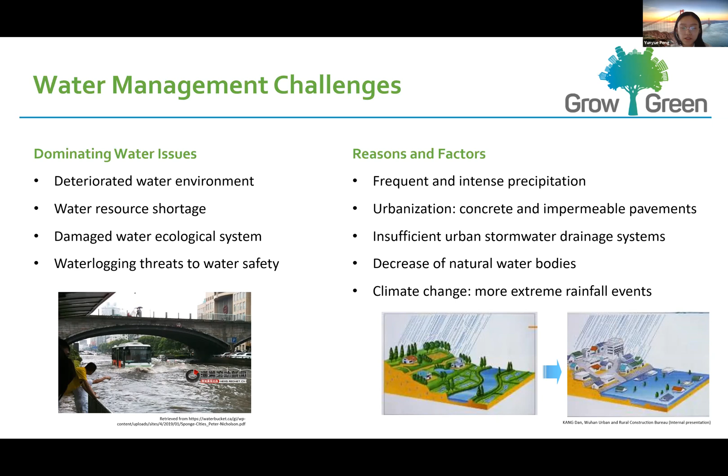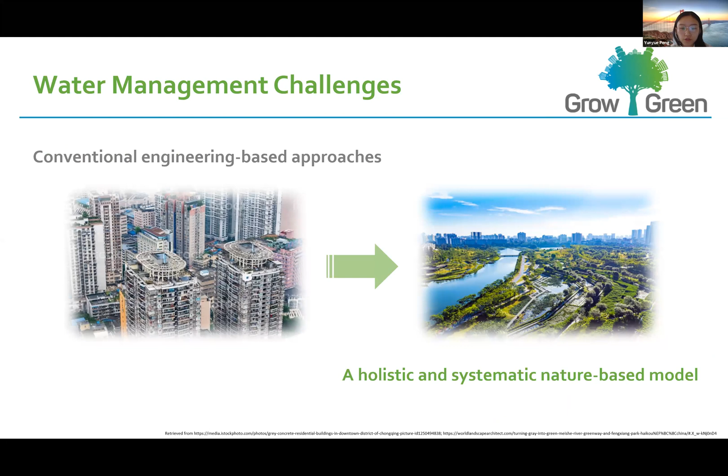In addition to that, the decreased natural water bodies and climate change has also exacerbated the situation. So there's an urgent need to transform from conventional engineering-based approaches to address the new types of water management challenges in urban areas to a holistic and systematic nature-based model.

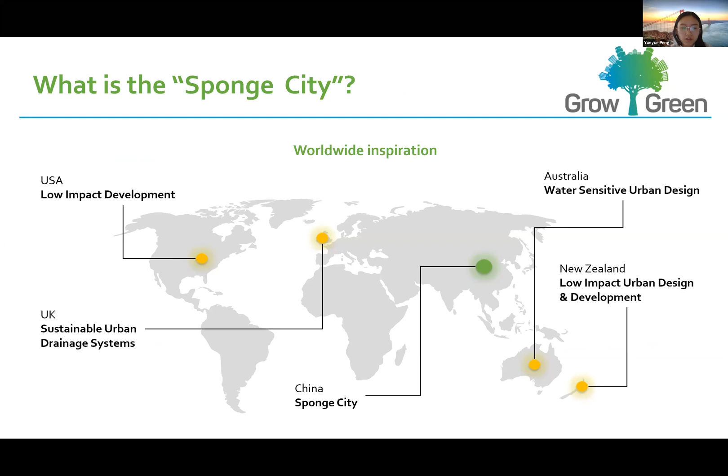So what is the sponge city? The concept was derived worldwide, similar to the concept of low-impact developments from the USA. The sponge city concept refers to a way of urban management that allows cities to use natural forces and

enable urban areas and infrastructure to act like sponges in order to resolve urban waterlogging and flooding, to improve water storage and water quality through a combination of nature-based and grey solutions.

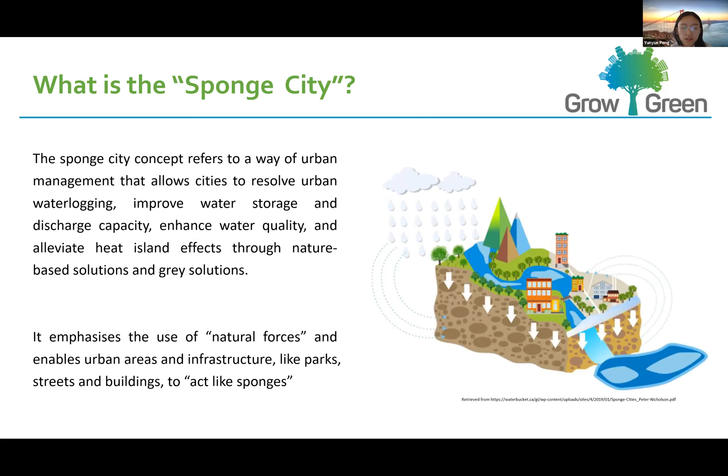The concepts also utilize 6 different technique measures, including infiltration, retention, storage, and purification.

Now let's look at the Sponge City program at the national level. At the national level, it sets the targets to construct 20% of the urban area into sponge standards by 2020 and 80% by 2030. They also published a set of national policies, and in total 30 pilot cities were selected to implement the program.

Then talking about the financial investment of the Sponge City program, different levels of governments work together to provide funds and also promote social investments to engage social private sectors in the Sponge City program through public-private partnerships and franchising.

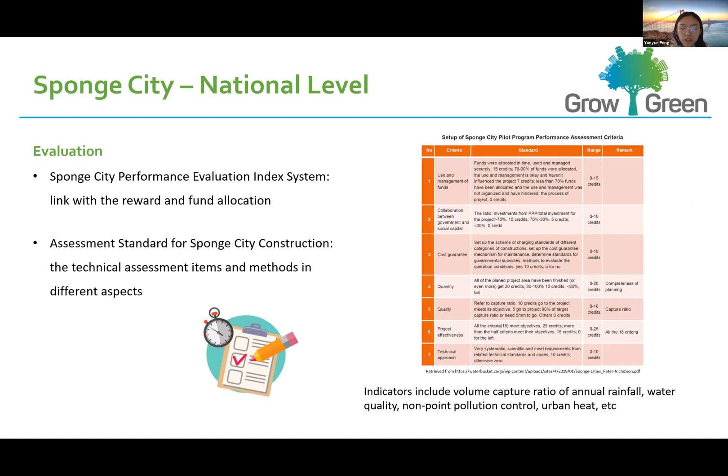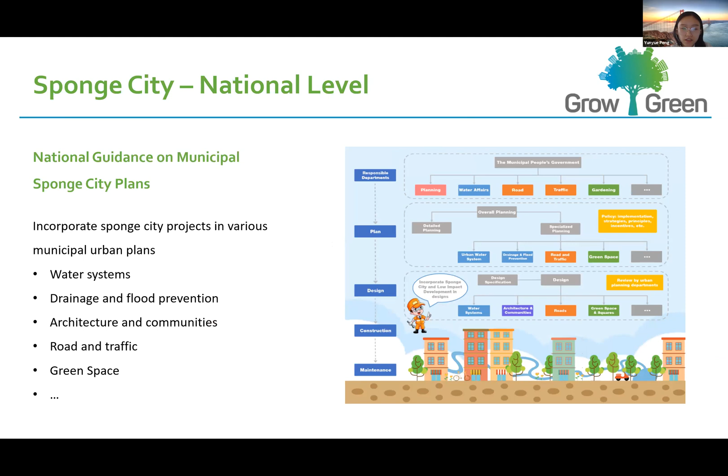The Sponge City program also established a set of indicators and evaluation criteria to evaluate the performance of different cities. And they also provided guidance to incorporate sponge projects in various municipal sectors and municipal infrastructure.

So let's move on to Wuhan. Wuhan is well known as the city of 100 lakes, and around a quarter of the municipal area is occupied by water. The principal challenges that Wuhan is facing include waterlogging and water pollution, primarily due to the low elevation of the built-up area, intense precipitation, urbanization, and decreased natural lakes.

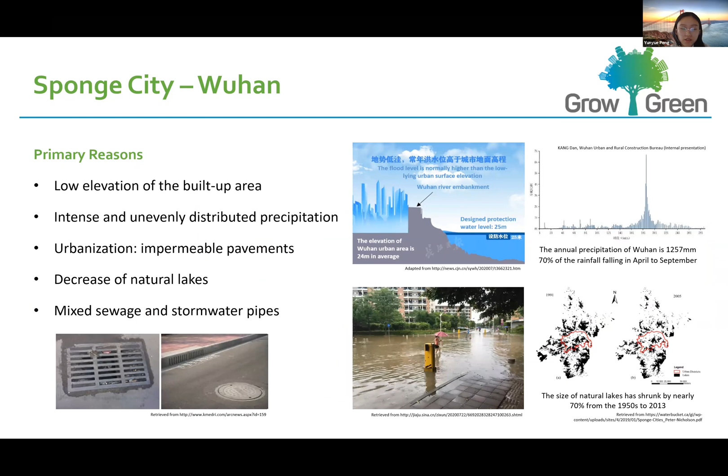And also the mixed sewage and stormwater pipes make the water pollution situation even worse.

Following the national guidance, they also set the targets as to construct 20% of the urban area into sponge standards by 2020, which has already been achieved, and 80% by 2030.

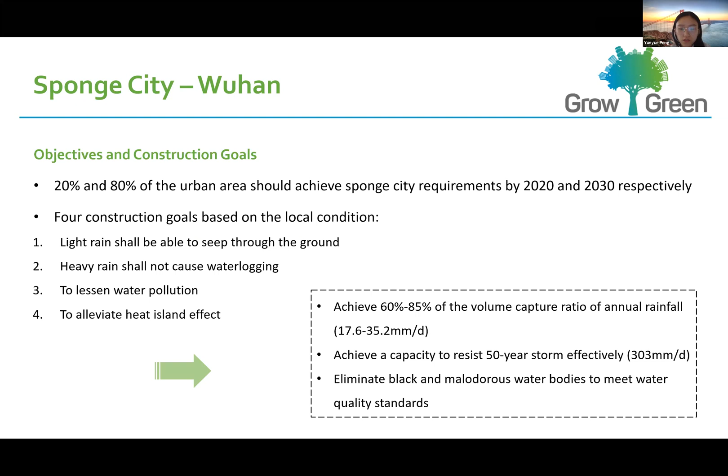To adopt the concepts according to local conditions, they also established different technique targets, such as the volume capture ratio of annual rainfall, the capacity to resist a 50-year storm, and to eliminate water pollution and improve water quality.

Wuhan has also addressed systematic and whole-process management using a combination of green, blue, and gray infrastructure. They applied both engineering and non-engineering measures. The non-engineering measures refer to daily operation, maintenance, and emergency response.

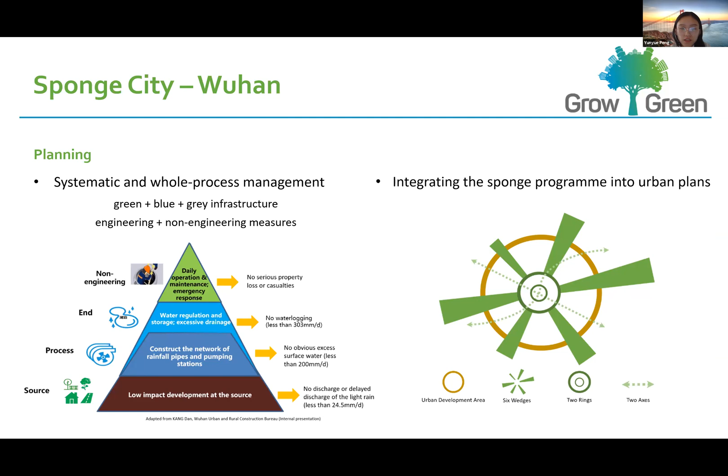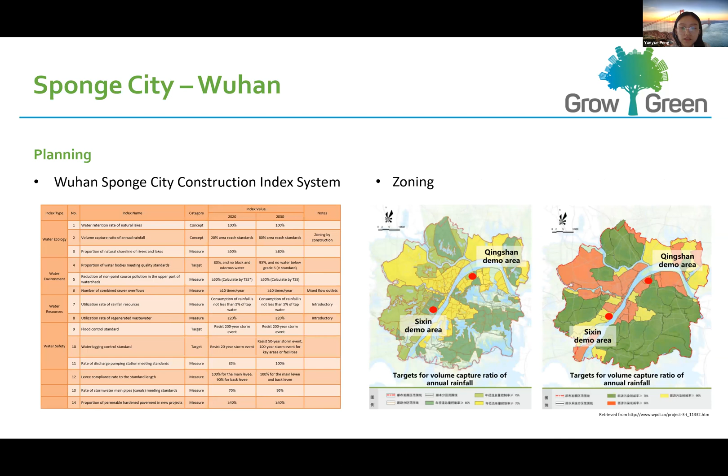They also proposed the plan to integrate sponge projects in urban comprehensive plans. The Wuhan Sponge City program also established an index system and allocated different indicators in different zones.

Specifically speaking about the sponge infrastructures, they have applied both nature-based solutions and green solutions, such as rain gardens, green roofs, grass swales, and also solutions including permeable pavements and rainwater storage modules.

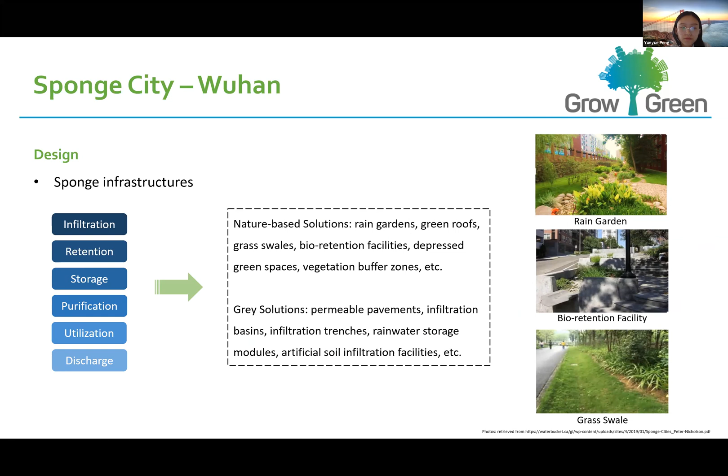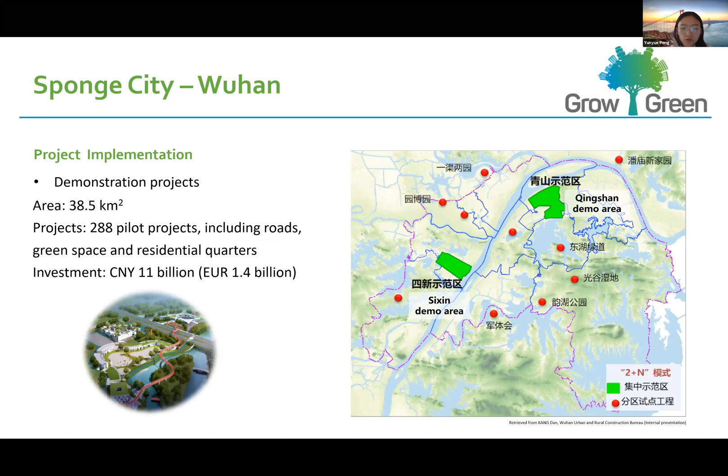Regarding the project's implementation, Wuhan has designated 2 demonstration areas, hosting nearly 300 pilot projects and attracting an investment of around 11 billion yuan. The 2 demonstration areas: one is located in an old residential quarter and another is located in the new development area, showcasing the different types of sponge technologies and facilities that can be used in different types of urban areas.

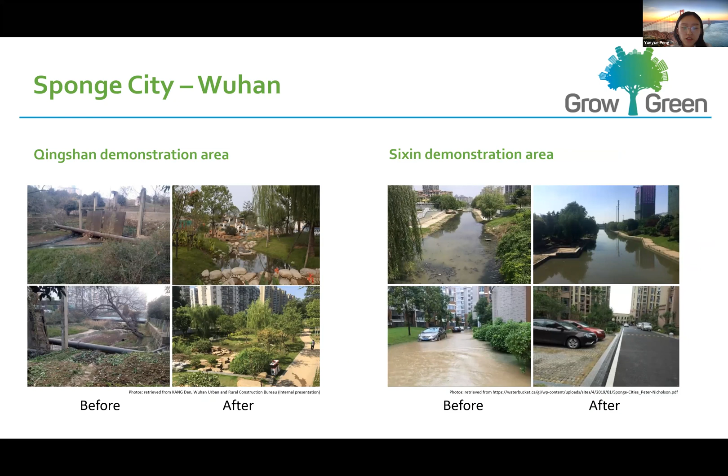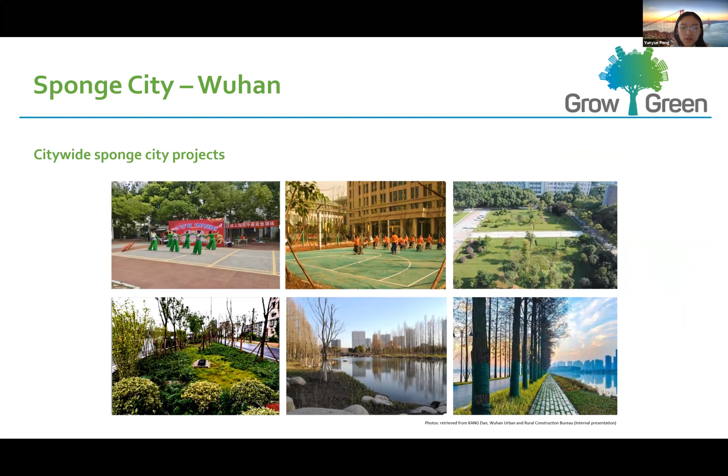At the same time, Wuhan has promoted sponge city projects across the city. Regarding the project's progress, they have already achieved the first goal of completing the construction of 20% of the urban area into sponge standards by the end of last year.

So far, they have achieved quite a few achievements, such as localized governmental management standards, a set of technical standards established by private enterprises, and Wuhan also built up a sponge science exhibition hall for citizen education.

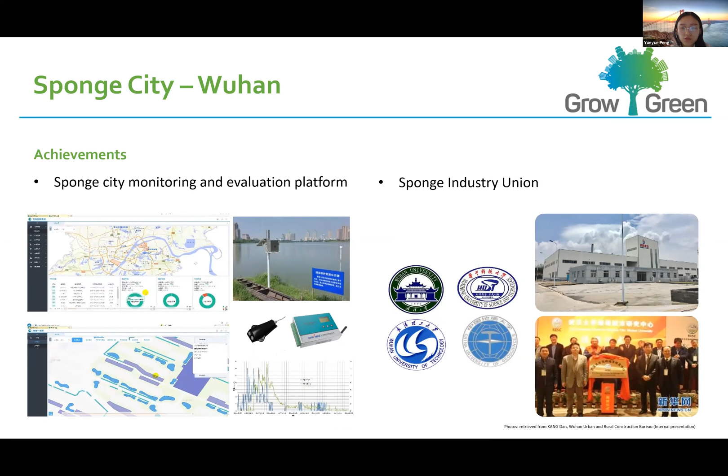Combining this with smart city technologies, they established the sponge city monitoring and evaluation platform to track real-time data and monitor sponge facilities effectively. Wuhan also formed a sponge industry union to promote research and industrial development of sponge technologies.

Talking about the performance of last year, which was another record-breaking rainy season when Wuhan suffered from multiple rounds of intense precipitation, the daily precipitation even reached 472 millimeters. Compared to the storm event in 2016, the number of waterlogging points, the maximum duration, and size area of waterlogging points was significantly reduced.

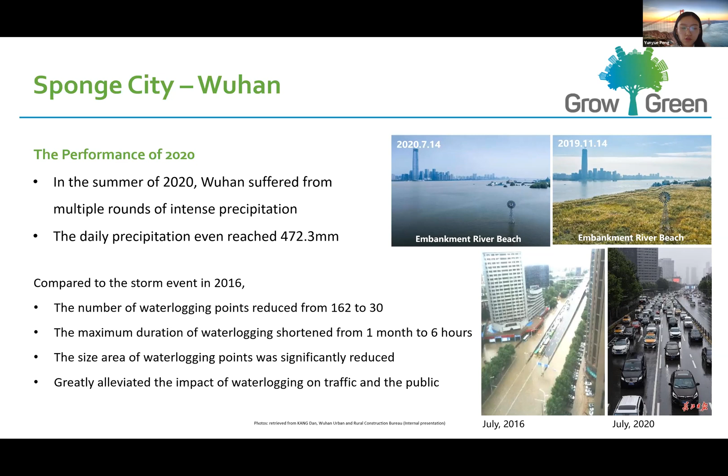If we take a look at the photos here, we can see the impact of waterlogging on traffic was greatly alleviated due to the construction of sponge city projects, showcasing the capacity and potential of nature-based solutions and sponge projects. Lastly, I will give a brief intro to one case study, the Qingshangang Wetlands Sponge Project.

This project is one of the pilot projects located in the old residential quarter, and there were many problems in the area. The river channel was congested with waste, so the drainage capacity was largely reduced, and also because the sewage pipes were discharged into the river channel directly, leading to heavy pollution and eutrophication in the ecosystems.

Also, the open space around the area was constructed into shanties and farmlands, so the entire landscape was quite poor before the construction of sponge projects.

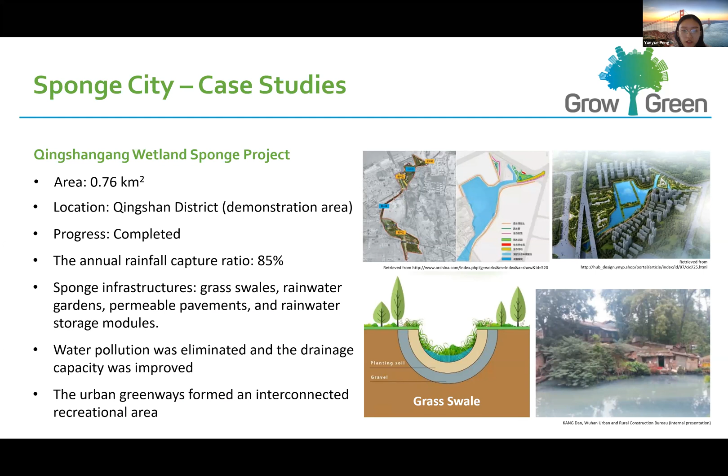These sponge projects aim to enhance the drainage capacity, improve the ecological environments, reduce water pollution, and capture 85% of annual rainfall. They also applied different types of spongy infrastructure, such as rain gardens and source control facilities to absorb rainfall at source, constructed artificial wetlands, and other types of spongy facilities.

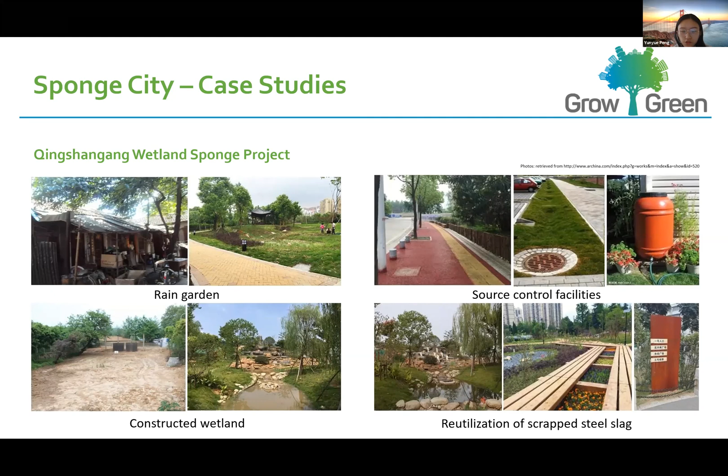In the end, the entire landscape quality has enhanced a lot, forming a recreational area, and the drainage capacity has also improved a lot, which has solved waterlogging and water pollution at the same time. So that's all, thank you.

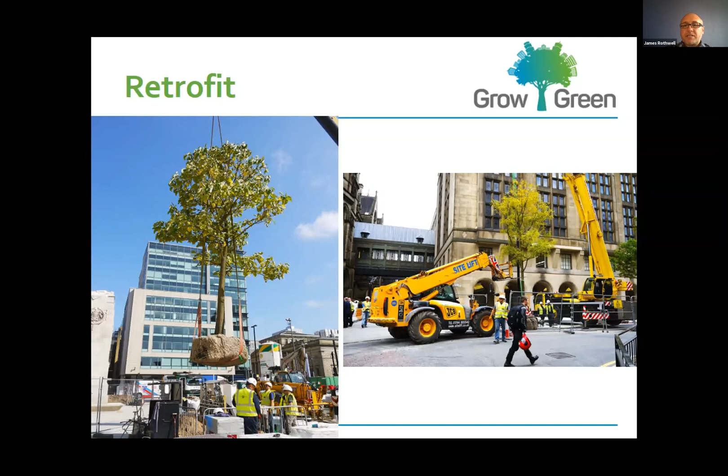Also innovation — Manchester has a tram-based transport network running through the city centre, and here we see sedum mosses planted along the tram tracks, a really nice feature helping with a range of benefits. Central to the Manchester green and blue infrastructure strategy is education and improving awareness, working at ground level with primary school children, who can then go home to their parents and talk about what they've learnt about green and blue infrastructure, the importance of nature, urban challenges in Manchester such as flooding and heatwave potential, and how nature-based solutions and green infrastructure can benefit that.

Starting at a young age and right through, there are important engagement actors within the Manchester area, such as Groundwork, which works closely with local communities, and also ambition as part of the Manchester strategy. This is from the City of Trees, a charity within Manchester, whose aim is to plant 3 million trees across the wider metropolitan region. So there's real ambition, real engagement, and real progress being made on the ground.

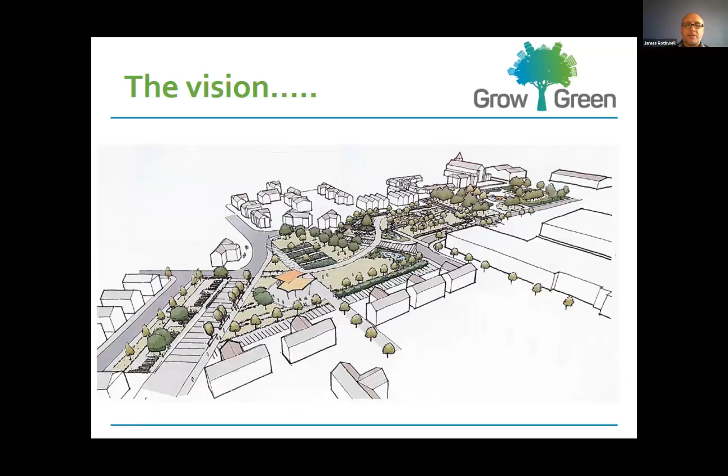The vision was to create a wonderful park that linked the local neighbourhood together, with great access and lots of play space for children, while also embedding nature-based solutions, green infrastructure, and sponge city principles into that design. First and foremost, it looks absolutely fantastic — I hope you all agree.

There's lots of high quality play space for local children to play, engage, and see the benefit of being outdoors. Woven into this play space is a number of sponge city principles: taking water that would ordinarily have gone into an overloaded sewer system with capacity issues that can lead to downstream flooding, and instead redirecting that rainwater, which would normally go down the drains, to be used within this green space.

So here we have one of a number of features which I'll take you through now — in our West Gorton Park, the park that drinks water.

This might look like a traditional basketball court, but it actually has a slight gradient, and the water is taken from the basketball court and used to irrigate the green space. It's taken into bioretention tree pits, watering those trees, with any excess taken off back to the sewer system. So it's reusing the water — ordinarily you'd have connected that water falling on the basketball court straight into a local drain and off into the sewer system, but instead it's disconnected and rerouted through the green space.

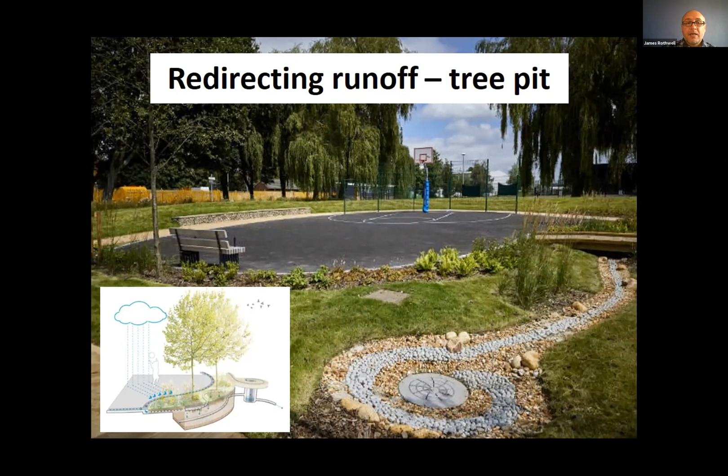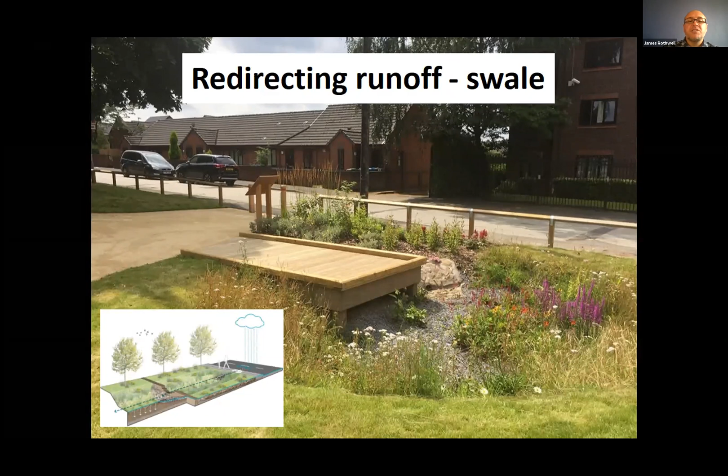Here we have, again taking inspiration from Wuhan, planted swales. Road runoff is redirected from this adjacent road, under the pavement, through that stone head wall, and into this planted swale — a really beautiful feature, with a little jetty area so residents and visitors can see and feel part of that feature.

It's not a feature that's tucked away in one part of the park. It's something that people can see the functionality, engage with and interact with.

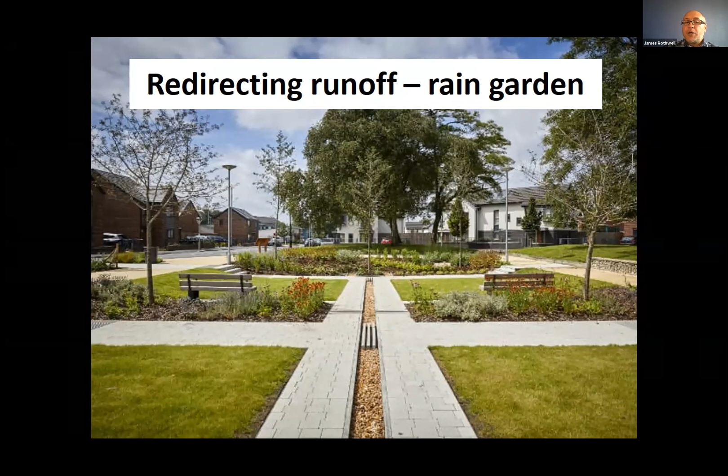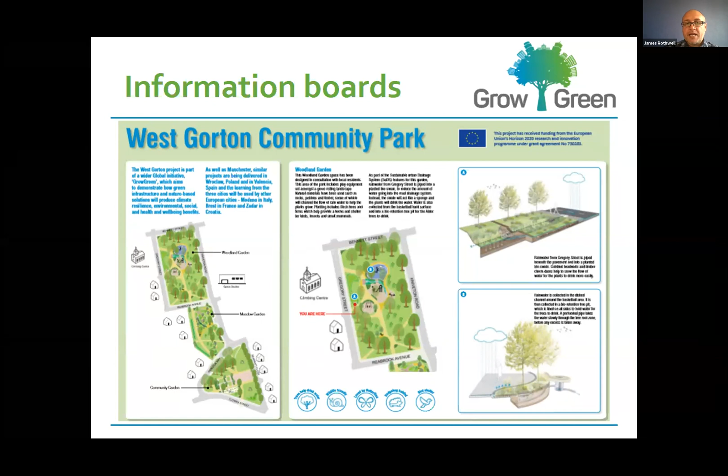Redirecting that runoff that would ordinarily have gone straight to the sewer system. Again, taking inspiration from Wuhan, and also what local residents wanted to see was, what are all these features? What are they doing? So we've got a number of information boards around the park that situate the visitors, the residents, where they are located, but also giving them some information about the benefits of what those features are doing. What are those check dams doing? Where is the water moving? What's it doing? What are the benefits? So really nice information boards for people to look at.

I just wanted to end now with some photos and a little bit of teaser data on the performance of these features in terms of runoff reduction. We're seeing really fantastic results. The water is being taken from the highway, infiltrated into the ground. The green space is using it, and very little, if any, is being returned to the sewer system.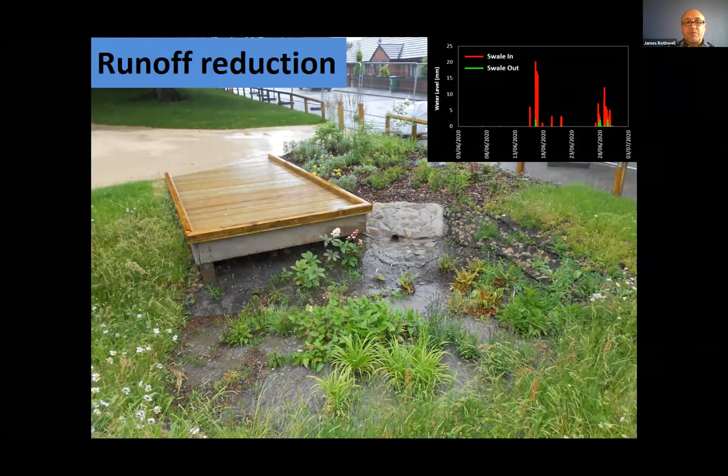So here we have just an action shot. In Manchester, as you may well know, we get lots of rain, and in particular sometimes very stormy weather. Back in early 2021 we had Storm Christoph, which brought huge amounts of rainfall, unprecedented levels of rainfall. So me being a geographer, I wanted to get out and see how the GrowGreen West Gorton Park was functioning. I ran out, got my camera and managed to get some action shots in the height of the storm, then revisited a few days later just to see how that water was being infiltrated.

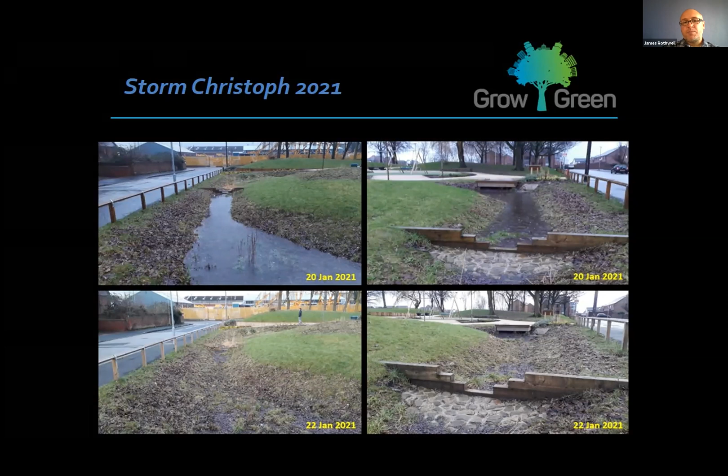As you can see, water in the height of the storm being held in this planted swale, held back by the check dam, encouraging infiltration. Then a few days later I returned, and look, it's all gone. All that water would have gone straight to the sewer system. So we've taken it out of that network and reused it in the green space for the benefits of the park. So I'd like to end there and thank you for your attention.

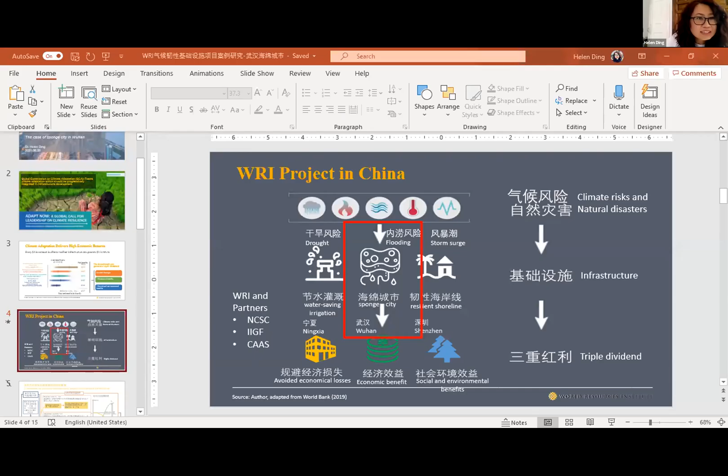So should I load my presentation? Yes, you can share your screen if that's possible. Just give me a second. It doesn't show up actually on my screen. If not, we can also show the slides and you can tell us when to move to the next one. Oh, maybe I didn't see all the windows, I have too many windows open probably. Sorry, oh yeah, I found it. Can you see the slide? Yes, we can see it. Okay, perfect, sorry about that. So you may want to show it in slideshow mode. Yeah, perfect, thanks.

Thank you for inviting me to present our recent project. Unfortunately, my colleague who is actually leading the Sponge City case in Wuhan couldn't join, but I'm happy to share some of our earlier experience there. So before I jump into it, I just wanted to give a very brief background on this project.

I want to shift a little bit the attention now to climate change. I think everyone here has probably been really involved in the current momentum around climate adaptation and climate resilience, especially for urban areas. And last year, in the Netherlands, we actually had the government lead a Global Commission for Climate Adaptation campaign, which set up several important discussions around building climate resilience in urban areas and also in other sectors.

And WRI, as the secretariat of the Global Commission for Climate Adaptation, up until early this year, developed a global study back in 2019 looking at global climate adaptation actions around the world. One of the components was looking into the economic benefits, and what we tried to do is really understand whether investing in climate adaptation early on could generate economic benefits. So in the study, we developed a triple dividend methodology looking at different benefits for investing in climate adaptation actions.

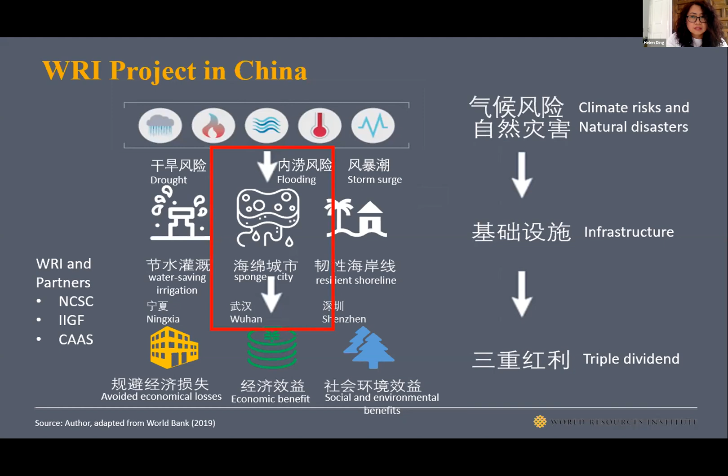I wanted to give a brief intro to the Wuhan case now, but please note that I won't be able to disclose too much detailed calculation at the moment, because the report is still under review currently, and the intended launch date is around September 2021. So I just wanted to use this opportunity to inform everyone to look out for a new study coming from WRI in the next couple of months, where we hope to share more detailed calculation around the benefits we have calculated for Wuhan.

As I mentioned before, what we did is try to look at climate risks projected for 2050 for Wuhan under the IPCC RCP scenarios. What we found is that if you compare different emission scenarios, in the future we can anticipate much higher temperatures in urban areas and also higher, more frequent rainstorm and flooding. That shows a clear trend of climate risk in the future for a city like Wuhan.

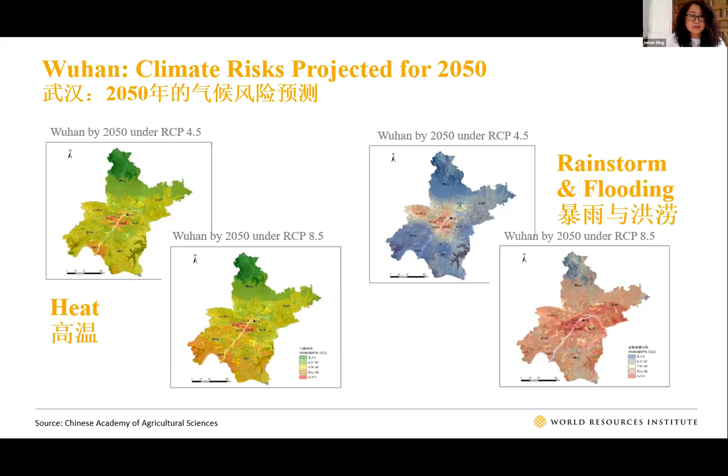Thanks, Yunyue has made an excellent presentation earlier, which laid the foundation for the sponge city concept, so I'm not going to dive into the detail about this anymore. But what I wanted to say is that by 2020, Wuhan wanted to increase sponge city coverage by 20%, and by 2030, the total urban built area that will meet the requirement for sponge city construction standards will increase by 80%. So there is a clear policy insight on building and expanding sponge city in Wuhan.

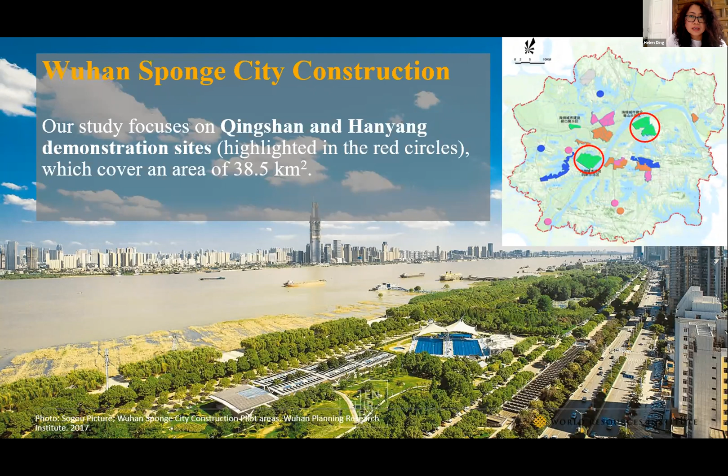In this study, we didn't look at the entire Wuhan urban area. What we did is look at 2 case study areas and try to get as much detailed information as possible to come up with the most robust economic analysis possible. So we look at Qingshan district as well, which was already presented in the earlier presentation by Yunyue.

What we did is look at the sponge city as a supplementary kind of infrastructure to the traditional drainage system, which you're familiar with as pump stations and pipelines. In the new sponge city construction, they actually introduced green infrastructure concepts and nature-based solutions to support the existing infrastructure. This is an important point to make, because when you look at climate resilience benefits, it's very important to understand what are the additionalities. If the city has already started to plan increasing pump stations and improving the current grey infrastructure, that doesn't really give you an understanding of what additional benefits can be brought by the sponge city construction.

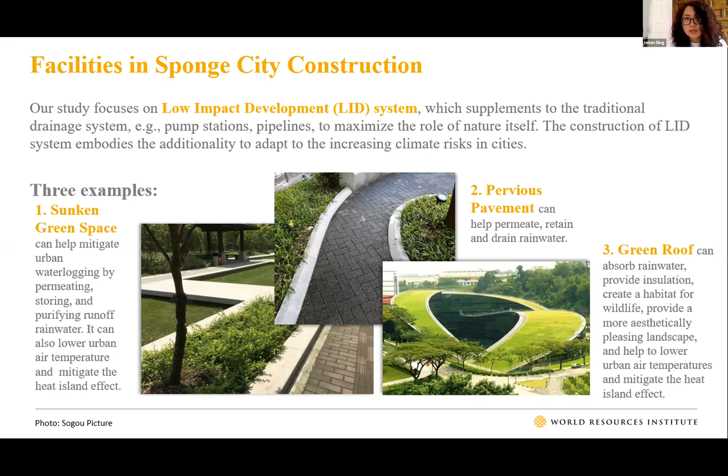So here we just focus on LID, in order to understand how much benefit can be attributed to sponge city infrastructure. In the study, we look at the avoided damage, which consists of 3 components. First is about avoided direct asset damage, coming from historical data to look at how much actual damage is caused by flooding, especially the historical flooding events in 2016, which was one of the major ones, and then the recent 2020 flooding events.

In terms of other avoided damages, green infrastructure can greatly help reduce the runoff, which helps reduce pressure on the existing pipeline network, and also reduces water pollution flowing into the river. All of this can contribute to avoiding costs associated with operation of the urban pipeline network, and also avoid the cost of water pollution control.

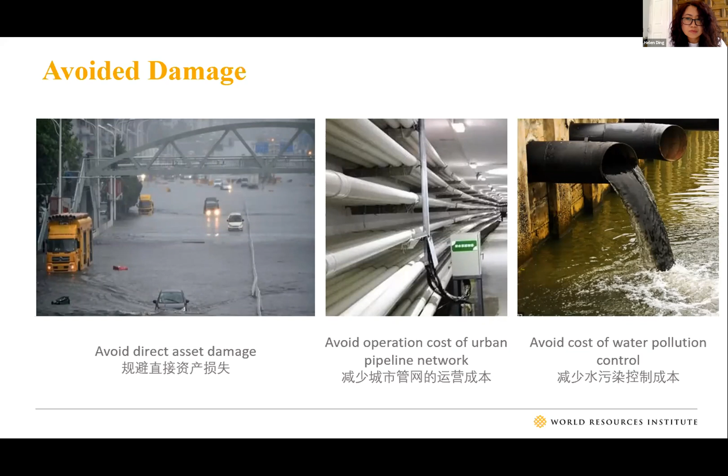In terms of economic benefits, we look at stormwater recycling benefits, where a lot of water can be recycled and support other activities in the city. Additionally, we also look at real estate value increase. I think James also mentioned that this is the case in Manchester as well—you see increasing value of real estate for housing in areas where there are larger green parks and other green infrastructure facilities.

Then the last component is about environmental and social benefits, where we look at how green infrastructure could help increase groundwater recharge, and also regulate climate and reduce air pollution, as well as increasing the recreational and aesthetic value in the urban area.

By combining the total three dividends in the benefits, we compared it with the cost of building climate resilient infrastructure, especially for the sponge city component. And we came up with a 2.3 return rate, which means every $1 investment could generate about 2.3 in benefits in return, which is quite beneficial if you consider there are quite a lot of other urban social benefits not really included.

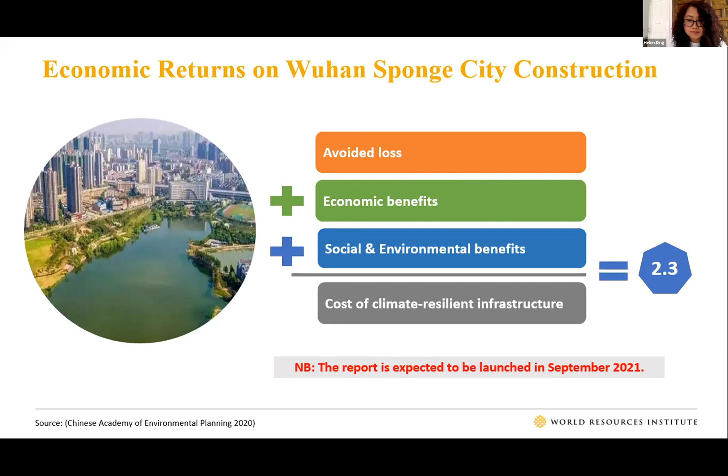But I hope that by September this year we can really disclose more information about our findings in a more detailed manner, so you can better understand our methodology for calculating all these benefits, and also the final return in more concrete terms.

So the last slide I want to show is a kind of scaling up analysis, trying to understand the urgency of scaling up sponge cities across China. This is a climate risk, flooding risk map, projected under the RCP 4.5 scenario by 2050. It shows the dark red areas where the highest level of risk is present.

The dotted green points show the current sponge city pilot cities, the blue points show the Chinese cities with GDP ranking in the first 30 in the country, and the purple dots show that among those GDP top 30 cities, which ones have piloted sponge city projects.

So you can see there's a huge potential to scale it up, especially in the southeast part of China, in the face of future increasing flooding risk. So it's really urgent for many Chinese cities to start implementing sponge cities to reduce future climate risk.

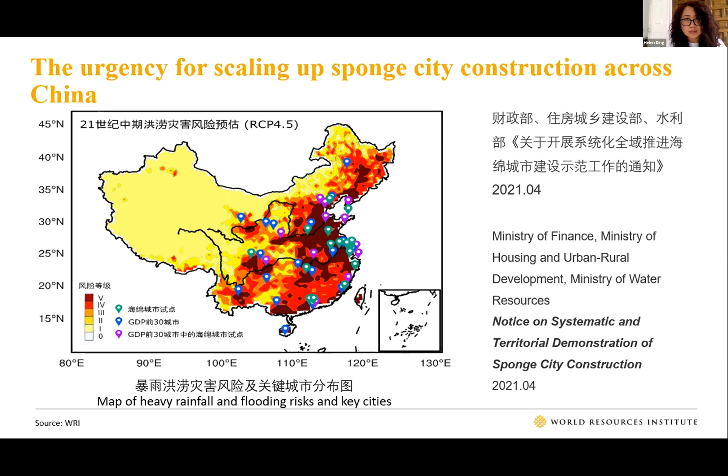Currently, the recent policy launched in April 2021, two months ago, shows that the Chinese government has made a new policy aiming to scale up sponge city demonstrations across China. So there will be more cities implementing the measure, showing the interest and intention of the Chinese government in constructing more pilot sponge cities.

So I think I will stop there, and thank you for your attention. If you have any questions regarding the Wuhan case study, please write us an email, and my colleague Wenyi could also reply to you directly if you have more tactical questions regarding the Wuhan case study. Thank you very much, back to you, Chantal.

Thank you very much, Helen, for all this important information and analysis, which gives us much more insight into the potential opportunities on the economic side. We really look forward to the report you mentioned. It's striking, as you say, at the global level, that potential return for investing in climate resilience, but also what you currently see in your monitoring in China, a 2.3 return. I don't know how that compares to cryptocurrencies or something like that, but nevertheless, I think it seems like a tremendous opportunity.

And this type of study that you do, I think, is important in really also helping investors on the public and the private side to see this value. Do you also have some conversations or dialogues with these investors on how we can really make that transition? Because at the moment there's sometimes still some reluctance or lack of understanding. Have you got more information on that?

That brings me to our next group of speakers. They are representing the Asian Development Bank: Dr. Jinqiang Chen, Mr. Stefan Rau, and Hinako Maruyama, all urban development specialists, and they will tell us more about key considerations for mobilizing financing for sponge cities. So I give the floor to you.

Thank you, Chantal. Can you hear me and see my screen? Yes, we can hear you and see the screen. Fantastic. Good morning, good afternoon, good evening, everyone. I'm Jin Chen from the Asian Development Bank. My colleagues today, Hinako Maruyama and Stefan Rau, and I will introduce key considerations for mobilizing financing for sponge cities. We will showcase 3 projects from ADB. Thank you all for the invite and this opportunity to make this presentation.

Prior to jumping into the details for each project, please allow me to give some background information on climate adaptation and climate resilience. The PRC is one of the world's most water-stressed countries. The per capita water resources are about just a quarter of the global average. By 2030, the country will need up to 20% more total water supply than it did in 2014, with a rapid increase in urban water demand. The water scarcity is further exacerbated by climate change, which will change the seasonality of rainfall, intensify extreme precipitation events, and increase the risk of urban flooding. The increased risk of urban flooding will further strain drainage and sewage infrastructure, and will make raw sewage bypass treatment plants and contaminate surface water.

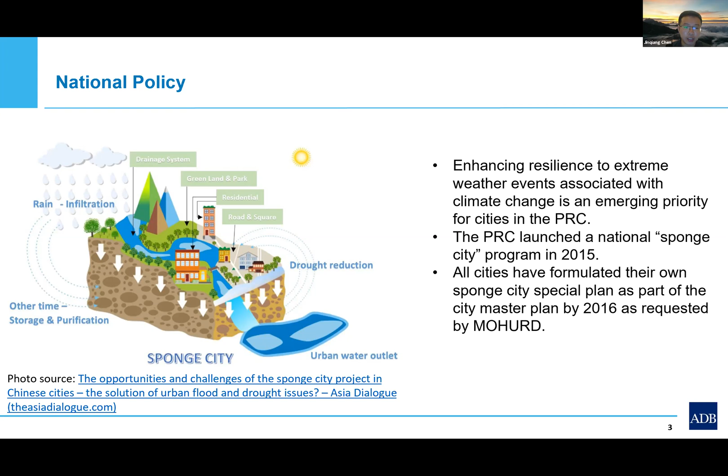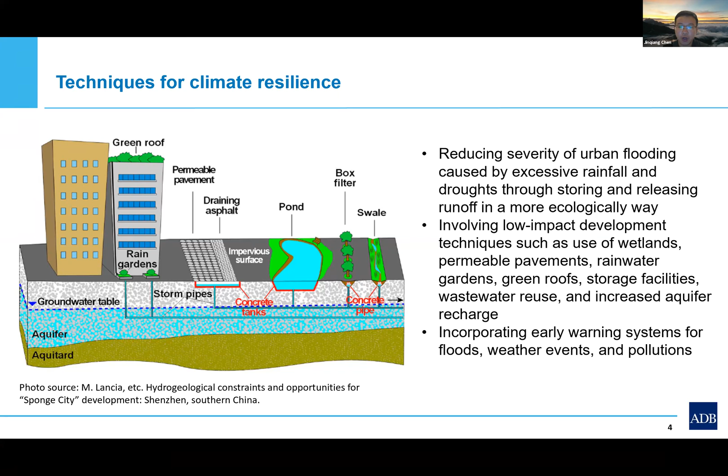There are a number of techniques for climate resilience, and several speakers have already discussed these techniques in previous discussions, so I'll skip those details. What we want to emphasize is that these techniques, which are low impact development, have already been included as technical eligibility criteria in the loan agreement of our project. Together, these techniques are expected to reduce the severity of urban flooding caused by excessive rainfall and droughts through storing and releasing runoff in a more ecological way.

This slide shows a very brief introduction of the project we were working on. This is a non-sovereign project, meaning we are directly lending to a company. The name of the project is Climate Resilient and Smart Urban Water Infrastructure Project. The loan size is 200 million USD equivalent in China yuan to support 400 million USD equivalent in capex over 3 years. This is a corporate loan, so the borrower is a water company.

Without ADB's assistance, the water company would have to raise financing for each separate sub-project from the local branches of commercial banks where the sub-project is located. ADB adds value by combining those sub-projects, which are too small or too costly to be financed on a standalone basis, and linking the cluster of sub-projects with a wider financing community, such as international financing institutions.

The loan proceeds will be disbursed to the water company and further channeled into multiple water supply and wastewater treatment sub-projects with smart water technologies and climate disaster resilient urban water infrastructure, in the form of equity or shareholder loans.

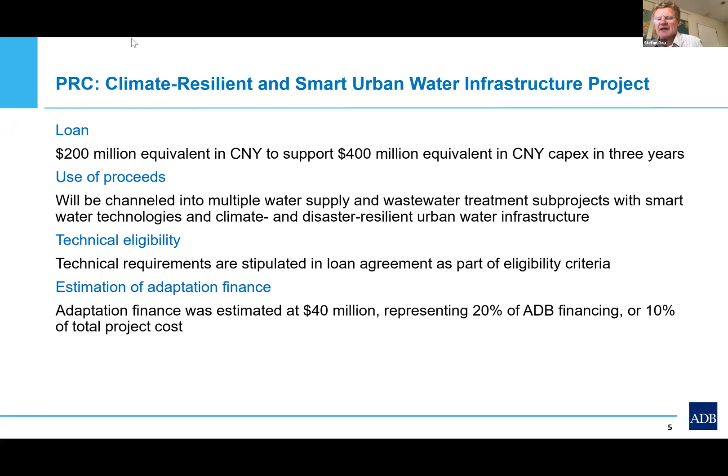Sorry. Thank you, JC. Thank you, Chantal, and friends and colleagues. Thank you for arranging this meeting. Can you hear me? Yes, we can hear you.

Thank you. So what JC just introduced was a loan to a private sector company. We have a private sector operational department, but ADB is perhaps more known for sovereign support, meaning loans to governments that are on-lent to local governments as a principle of finance.

Pingxiang was one of the 16 first sponge city pilots, and ADB investments complemented government investments. The government focused on the urban center area of Pingxiang, while ADB investment supported 4 sub-centers in suburbs or rural counties to bring the benefits closer to rural people, hence the title of the project.

ADB also focused on river flooding and integration with ecological river rehabilitation, improving water quality and enhancing habitat to increase biodiversity.

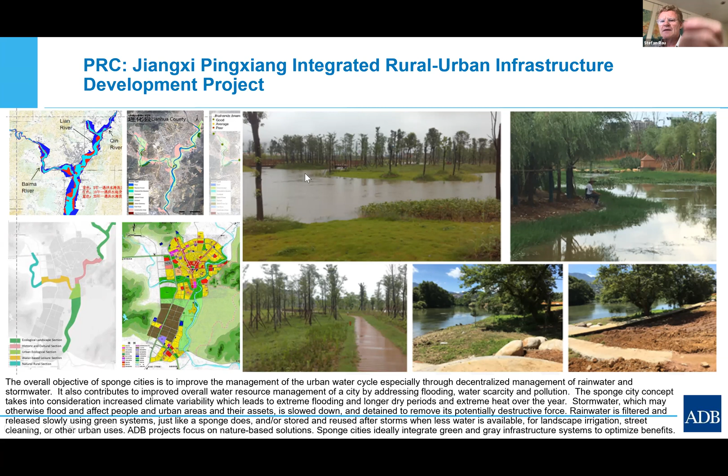The next project I'll show is— next slide please. Can you hear me? Yes, we can hear you.

Thank you. This project is in the far northeast, sorry, one slide before, in Jilin province and Yanji city.

In this project we are integrating multiple urban infrastructure investments with green infrastructure and sponge city green infrastructure investments. The city organizes itself in an east-west direction, and we're supporting the first bus rapid transit line in the northeast in general, which will reinforce and transform the city to become a transit-oriented development place. We're integrating the bus service with pedestrian and bicycle improvements, alongside new green corridors and small streets that link to the river. We also improve water supply and wastewater management and specific health outcomes.

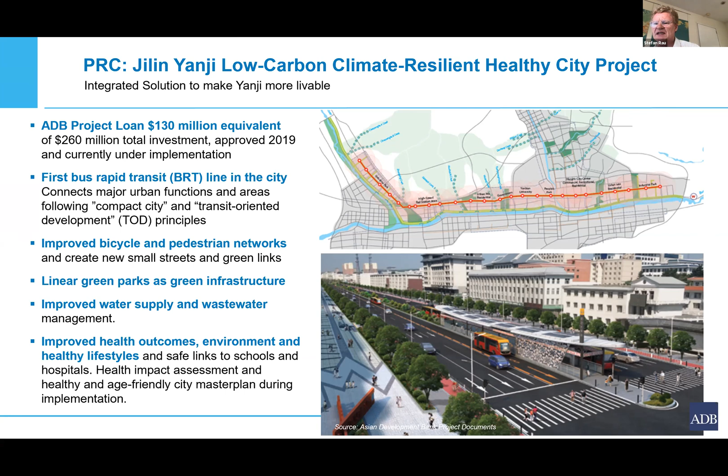Next slide please. We have prepared a sponge city master plan for the entire north part of the city, which you can see here on this slide on the top right.

We have proposed and will invest in a complete transformation of the underground gray infrastructure, the drainage pipeline infrastructure, which is now basically parallel to the big east-west river, the Buerhatong River, and very inefficient—transporting water parallel to the river instead of directly into it. That is our change. We will have shortcuts bringing stormwater directly into the river, and end-of-pipe solutions that are also green infrastructure.

Before the first flush of the stormwater goes into the river, it will be cleaned with ecological mechanisms. We also have specific sponge city infrastructure based on these catchments of creeks, with green roofs, rain gardens, opened-up covered canals, bioswales and so forth—things already shown in this webinar.

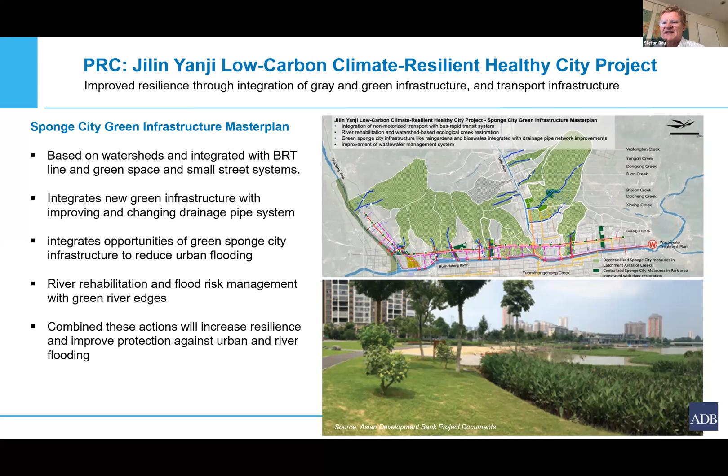In the next slide we can see the integration and the systemic modeling and simulation. Next slide JC, really demonstrates how integrating the gray infrastructure with the green infrastructure is very effective.

We've simulated this in a detailed hydraulic model for each of these catchments. Here is an example of one catchment with this uncovered canal you can see at the bottom right, and together with the drainage pipe system improvements, we basically eliminate all urban flooding in the future of that city.

We also improved the water supply, conserving 4.8 million cubic meters of water resources by reducing the non-revenue water they currently have. I'll stop here and give the word to my dear colleague Hinako. Thank you.

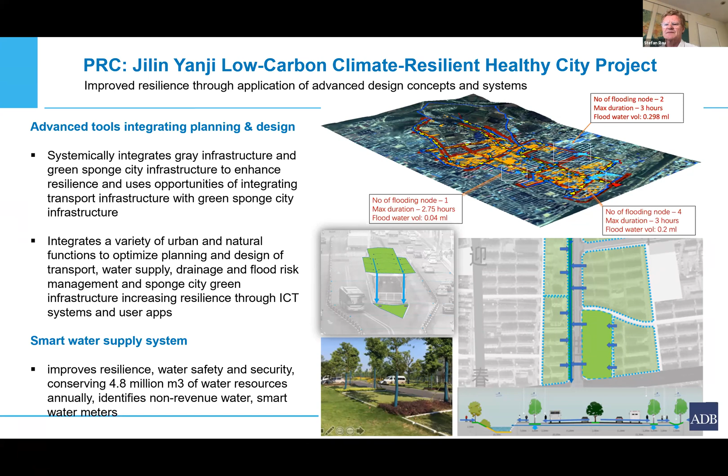Hello, thank you Stefan. I'm going to talk about the case of Huanggang, which is just next to Wuhan. We just heard from Ms. Yungyue and Ms. Helen very good samples from Wuhan, so I won't go into detail. This Huanggang is also along the Yangtze River and is very prone to seasonal flooding, and the water quality in the urban lakes and rivers is not so good.

ADB started this investment with a $100 million loan, total project size about $252 million, since 2014. This project is still ongoing; we are still under construction.

We are basically trying to work with the municipal government of Huanggang to improve the lake and river quality, and also improve the environmental facilities in the city. At the same time, we try to solve the solid waste problems so as not to further pollute the water, and enhance institutional capacity to properly implement and monitor water quality and flooding control. If you can go to the next slide please.

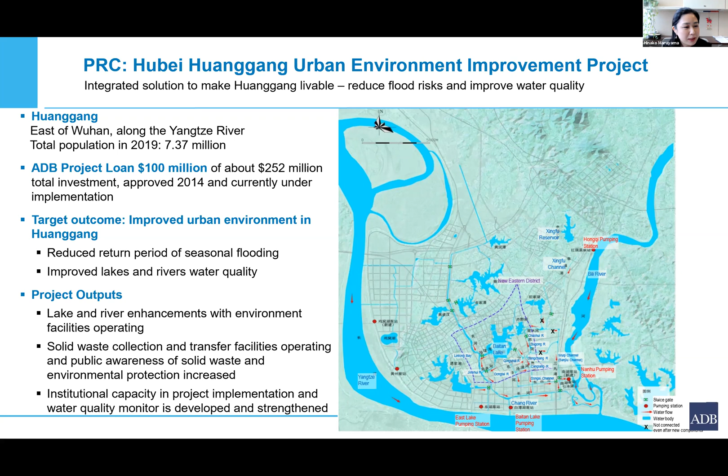So we tried to use an NBS approach. We didn't claim this as a sponge city, but basically the idea is a sponge city approach. So in the existing urban lake, we tried to construct a surface flow constructed wetland, quite a large area, about 80 hectares, so that it can absorb the flooding water, but also serve to filter urban water pollution.

And also a subsurface flow constructed wetland. We tried to use a biological approach, using local species - plants, fishes, mollusks, and benthic creatures - put into the water, trying to use a natural way to remove the pollution.

And for flooding, we used some engineering measures too, like sluice gates to control the urban water, because there's a lot of water at different levels in the city, but also tried to enhance water circulation and constantly monitor the quality.

And in the nearby communities, they still use the combined sewage system. We tried to separate it into separate stormwater and sewage collection.

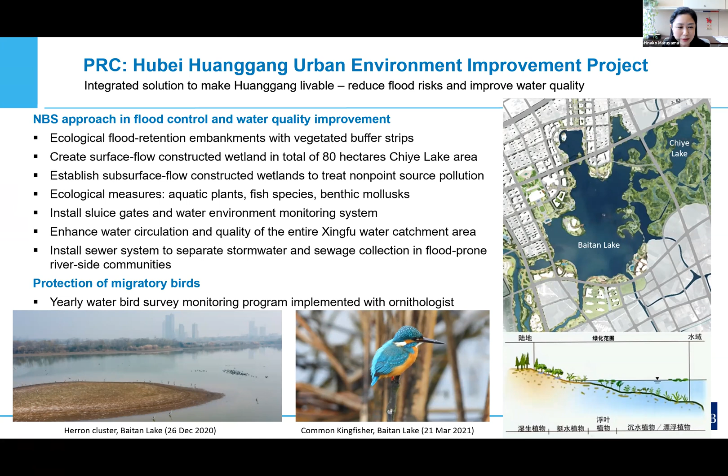And in terms of biodiversity, as mentioned earlier in the Wuhan case, there are a lot of migratory water birds here. So we try to constantly monitor if our intervention is not impacting or reducing the species, but rather contributing to increasing the biodiversity.

Another case is still in preparation. This is not directly on urban water, but rather a mountain rehabilitation project in Guangxi province in Hezhou city. We tried to use nature-based solutions because the mountain area was quite polluted due to mineral mining. The soil was polluted by heavy metals, and as a result, the surface water and groundwater were also polluted.

The initial government approach was to use engineering methods in 10 heavily polluted locations, applying very heavy engineering and chemical measures to improve the water pollution. But ADB worked with them to reduce the engineering measures as much as possible, using only 4 sites for engineering measures, with the remaining 6 to be naturally restored.

As a result, we reduced the cost of the project by about one third. This is still to be implemented, so we need clearer direction, and we're discussing with experts from IUCN how to really implement this idea. But this is just what we're now preparing in the Guangxi project.